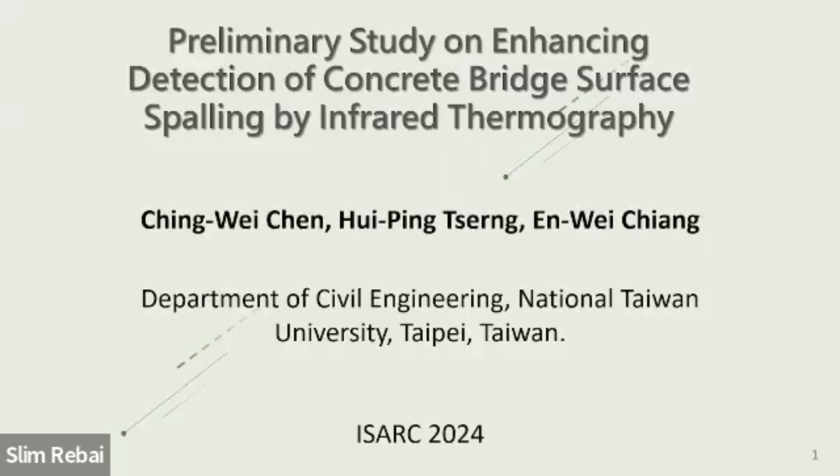In Taiwan, we have 20,000 bridges around the whole island. Also, it's a very beautiful island. And we have a lot of earthquakes. This year, on April 3rd, we just had a 6 degree earthquake. But it's good, not much damage. However, we still had one bridge on the east coast destroyed. The traffic was stopped for around 2 weeks.

So in our topic, because we have a lot of bridges, we need to do maintenance and also a lot of inspection around the whole island. We have typhoons, heavy rain, and also the concrete bridges have corrosion, overloading, temperature change, and also the aging problem.

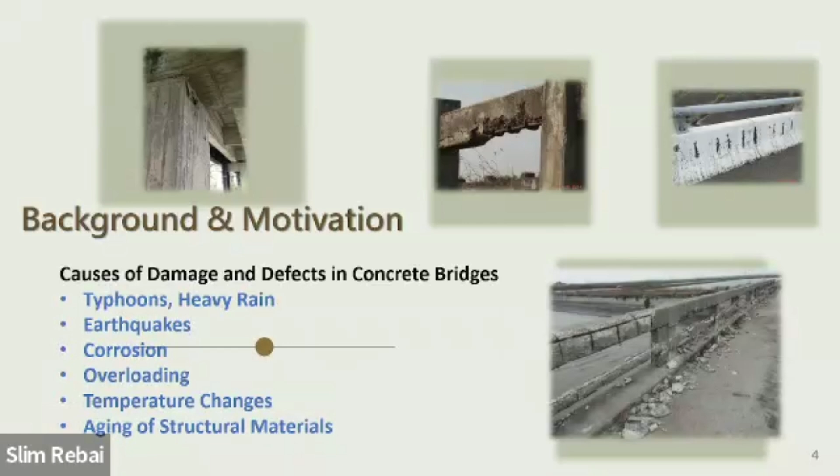Currently we are using humans to do those inspections. So we do a lot of work on this, and also spend a lot of budget to do the maintenance. We also need a lot of special equipment to check the underground concrete problems, the underwater, and also the foundations as well.

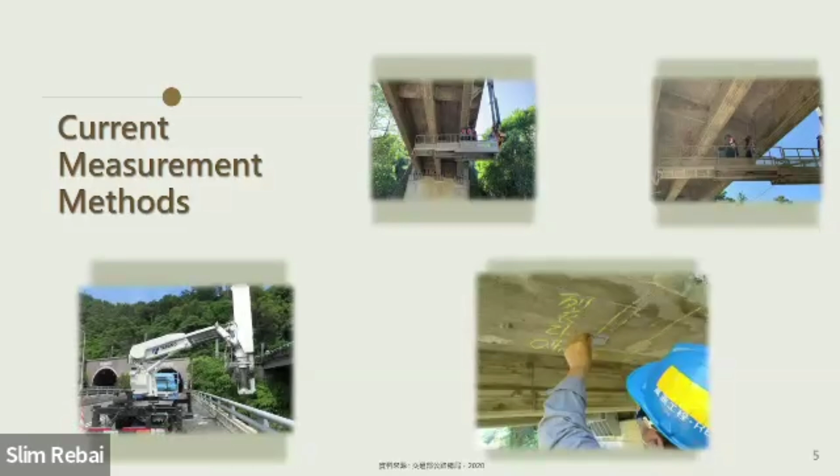My research started about 10 years ago, and right now it's still ongoing. The basic idea is very easy. When you build a new bridge, it has a natural frequency, and the natural frequency can be calculated using structural analysis with SAP2000.

But over time, the concrete can have defects, and also the foundation because of scouring. In Taiwan, we have a lot of scouring problems because the water force of the rivers is very heavy, so it takes out the foundation. So our basic idea is, if we measure that the natural frequency is changing, the bridge has some problem inside. So this is the basic idea.

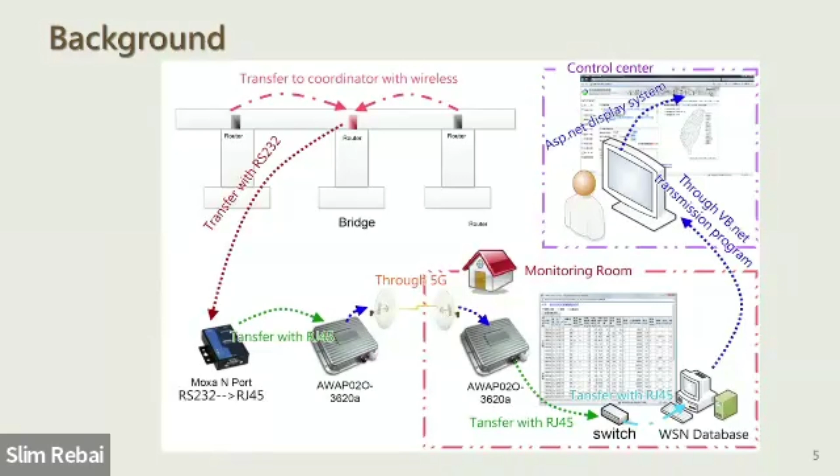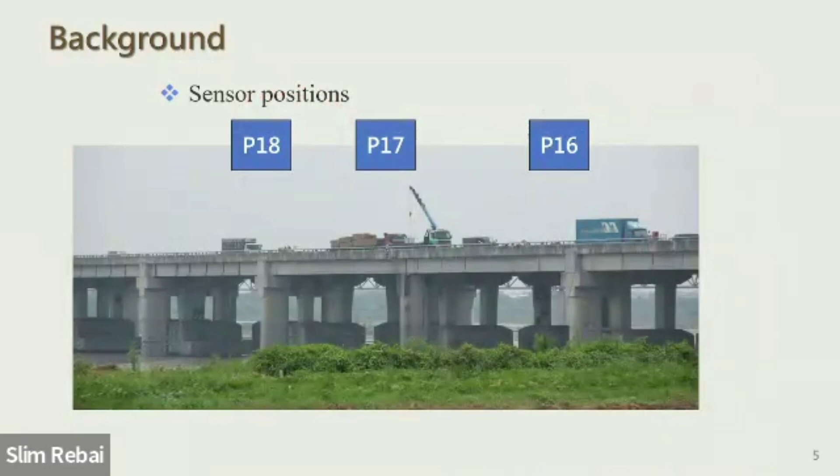So right now we install a lot of accelerometers in the bridge, and then measure whether the natural frequency is changing. Okay, this is the basic idea. This is 10 years ago. We did it on the bridge, and the bridge is very heavy. And this is myself.

We installed the sensors along the bridge. And our problem is how to collect the data in real time. That's very difficult. Originally, we used wires, but the wires sometimes get destroyed. Then we used wireless. But, as we know, 30% of Taiwan's bridges are in the mountains. In that area, communication is very difficult. We don't have 4G and 5G, so it's very difficult to transfer the data to the control center.

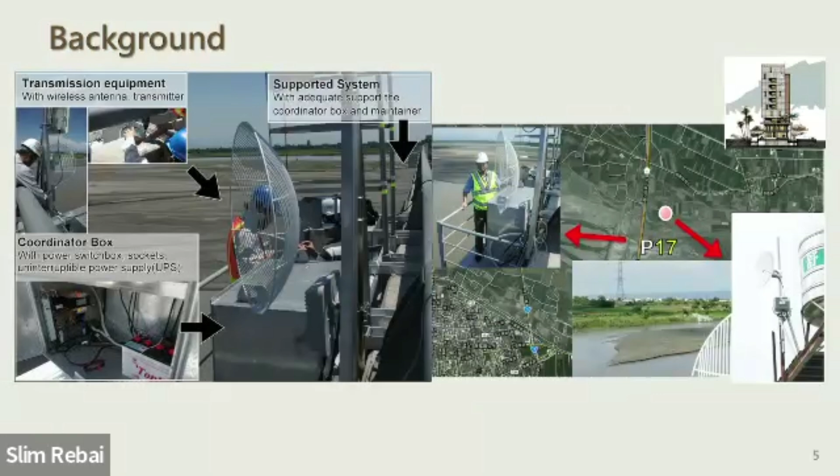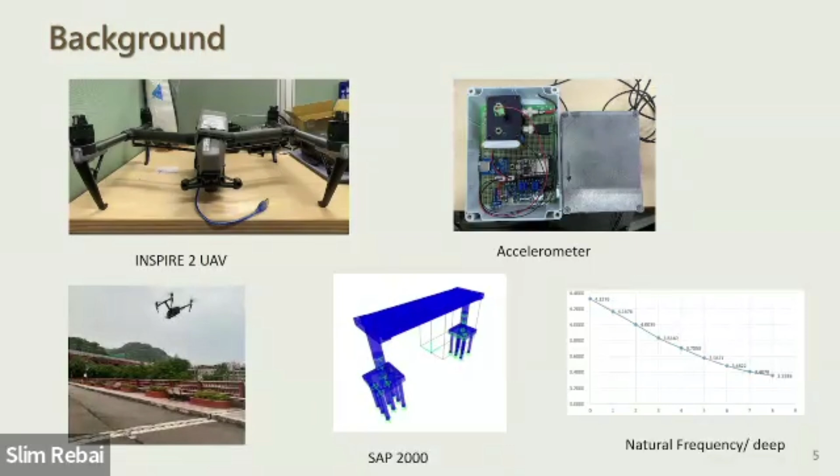So for those bridges, our idea is to use a drone, the UAV, to collect the data frequently, like once a week or once a month. Then we collect information like the natural frequency to see if the foundation is okay. So the basic idea is from here.

When we use the UAV to collect the information there, we can also collect images around the bridge. But after we process the images with AI image processing, the correction rate is like 80%. So we want to improve the correction rate. We try using an infrared thermal image camera combined with a real camera, taking the pictures and then processing.

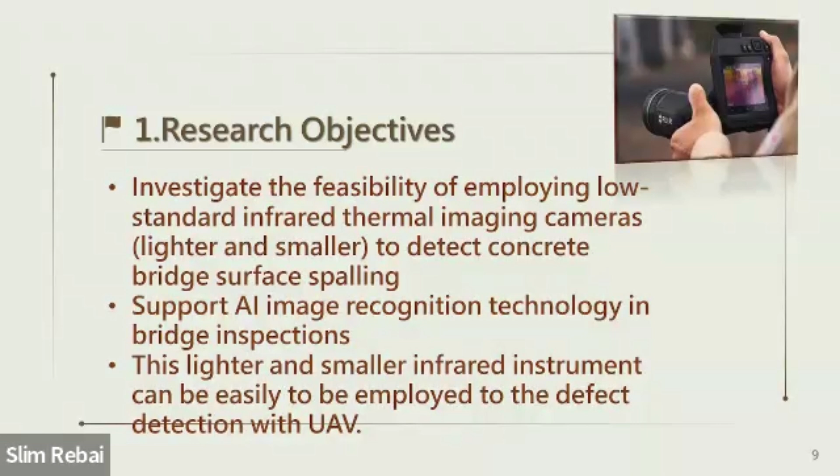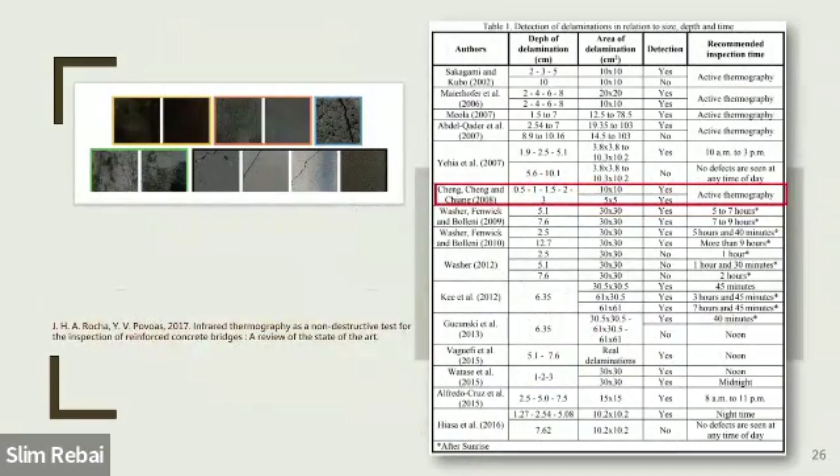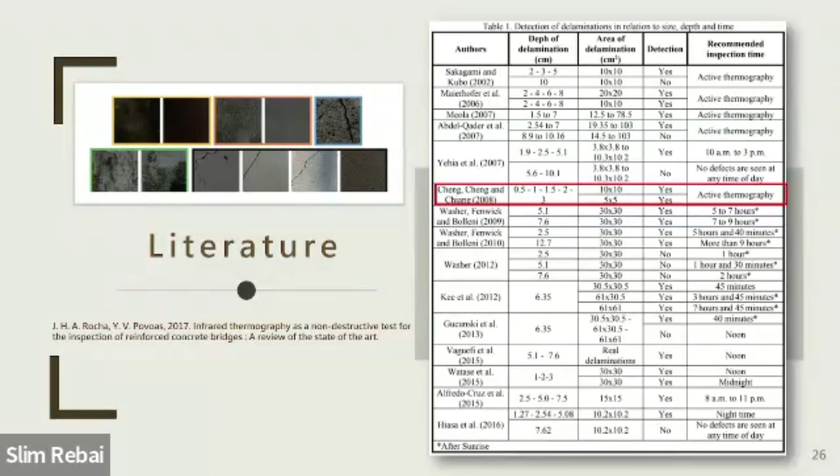So we reviewed the literature from 10 or 20 years. A lot of people use infrared to measure concrete cracks. But the problem is the infrared equipment is very heavy. It's like 10 kilograms, so you cannot carry it by UAV. So our idea is to use a lighter, lower standard infrared camera to collect the data.

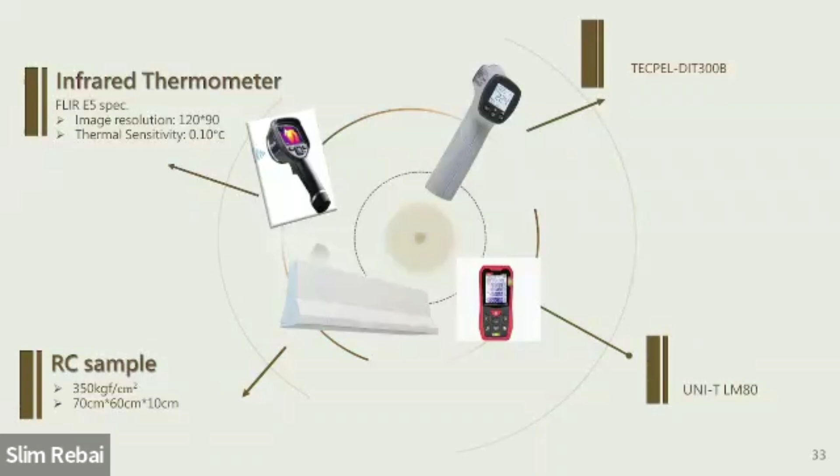The standard camera can be carried by the UAV. But is it okay to combine it with a real camera to do image processing to detect the concrete problems? So the basic idea is from here.

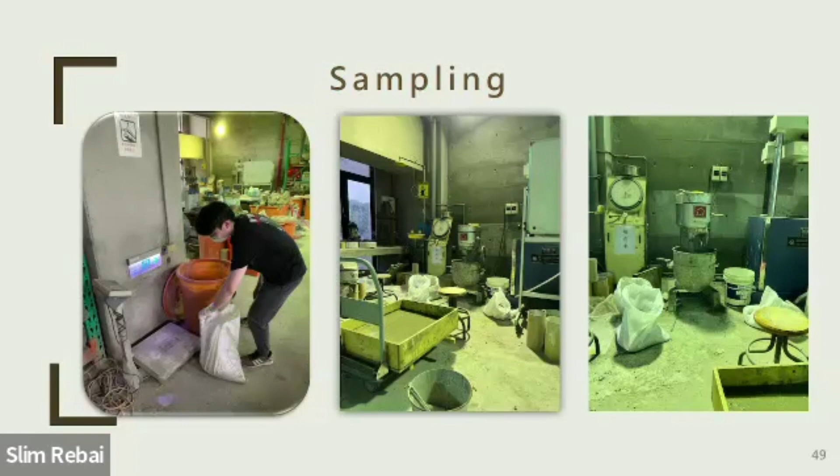So this is the hardware we use. For sampling, we developed like 20 concrete samples like this. They're 60 centimeters and 70 centimeters big, 20 of different sizes. We want to know whether the standard infrared can do this or not. So we collected like 60 to 70 samples of those cracks.

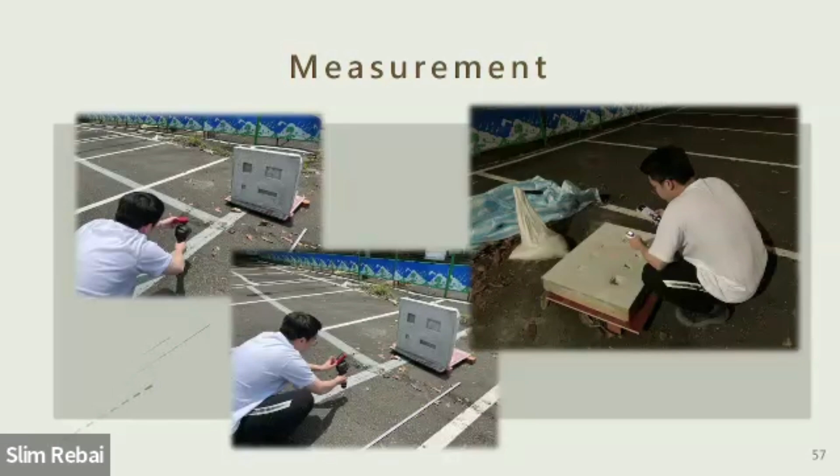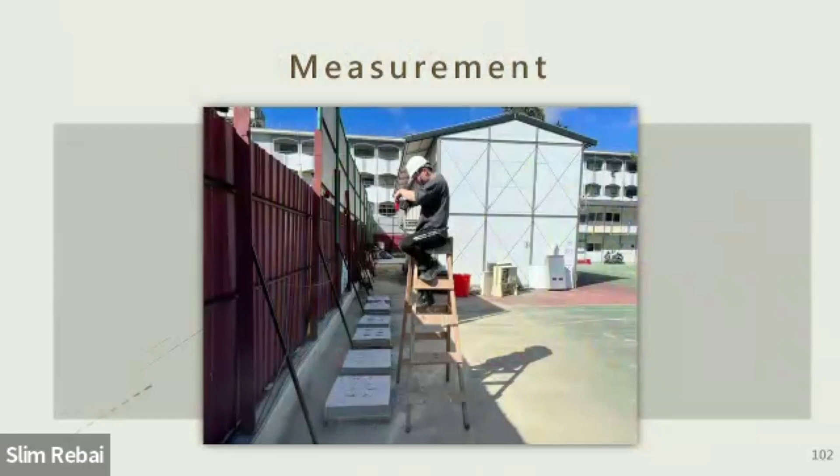And also doing the measurement. We also did some measurement on the real bridge. And we also developed the equation and the program to calculate the temperature difference.

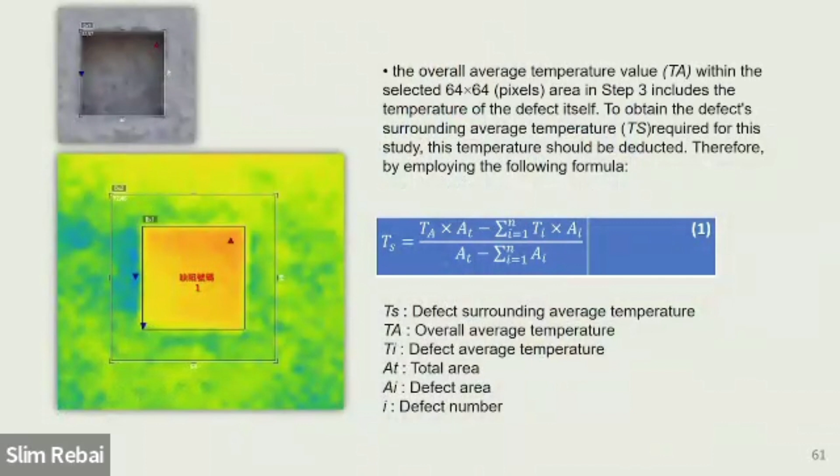What we found from the literature review is that almost all those using infrared to detect concrete cracks use active processing and also passive processing. Active processing means you have to heat the concrete sample, but with passive, you don't need to do that. So we chose passive measurement.

During passive measurement, it depends on the sun exposure. With long enough sun exposure, the concrete sample is heated and can be measured by the infrared. This is the idea. So we measured over 24 hours and found that around 3 p.m. to 5 p.m. is better to get the sampling.

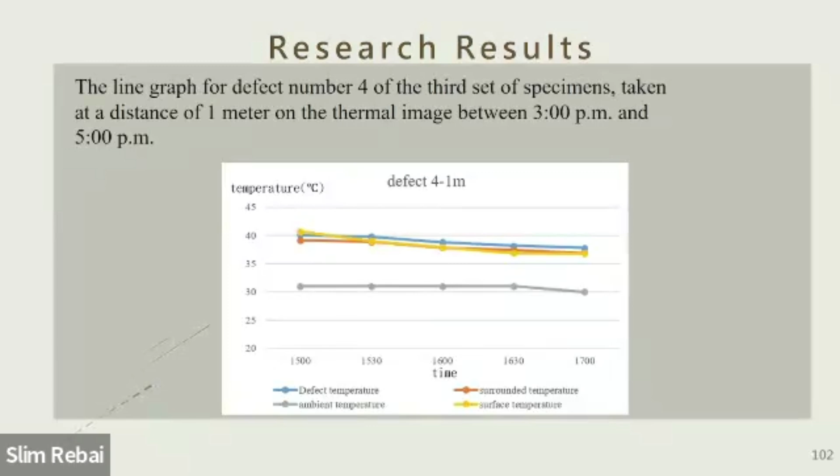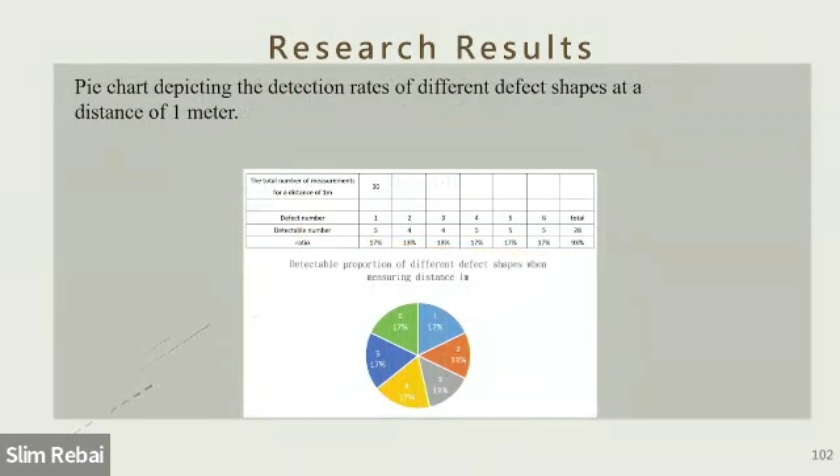And how about the distance? The distance is about 1 meter. 1 meter distance to the concrete sample is better to get a measurement. So this is what we found. So let me go to the final findings.

In the first phase, if we just use image processing on the cracking samples we have, the percentage detection is like 88%. But if we combine with infrared, we can get 100% detection. So this is the point we found. It's better to use the image and the infrared combined together, put it on the drone, and then do the measurement. That's the basic idea that we found.